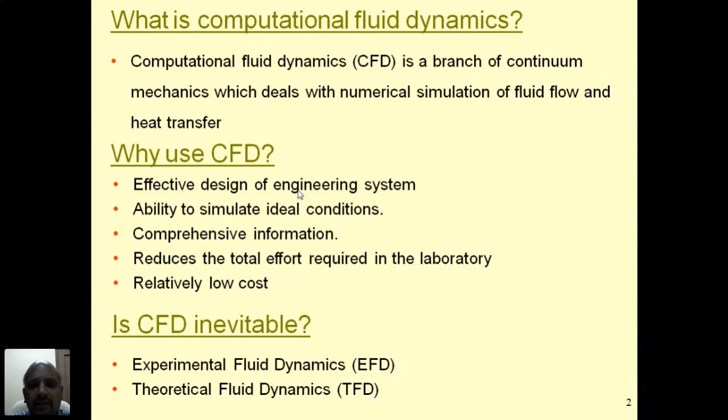In order to gain the advantages listed here, effective design, impossible conditions also, where we can analyze by using the computational method complete information for a given problem. So we can reduce our time as well as the cost, everything with the help of a computational method. These are all the advantages. So we can use CFD before the start of any experimental fluid dynamics.

To become a master in this subject, computational fluid dynamics, we should know the basics or fundamentals of three important subjects. One is fluid dynamics, then numerical methods, and heat transfer. Because, as I said, computational fluid dynamics is nothing but numerical simulation of flow and heat transfer, as well as mass transfer. So if you want to become a master in this subject, you should know the basic aspects or basic knowledge of fluid dynamics, numerical methods, and heat transfer, even mass transfer also.

Not only that, after gaining enough knowledge from these three different subjects, if you would like to apply this CFD concept in specific applications like combustion, mass transfer with phase change phenomenon, melting and solidification, rotordynamics, turbo machines, heat exchangers, aerospace, automotive - for different applications, you should know basics of the respective field. So after gaining knowledge from these three main subjects, we can apply the computational fluid dynamics concept to various engineering domains to solve engineering problems. That is the knowledge prerequisite for this subject.

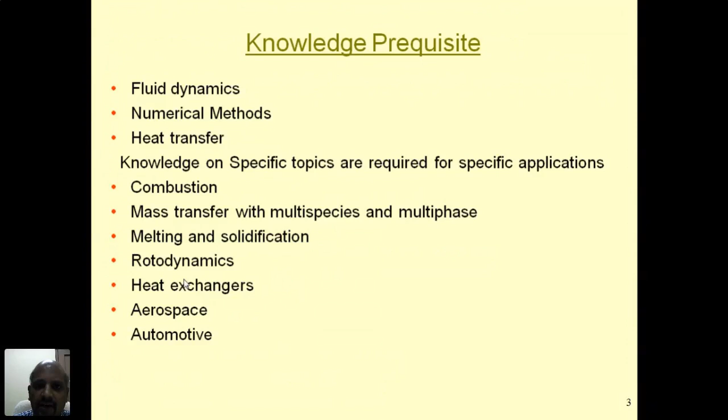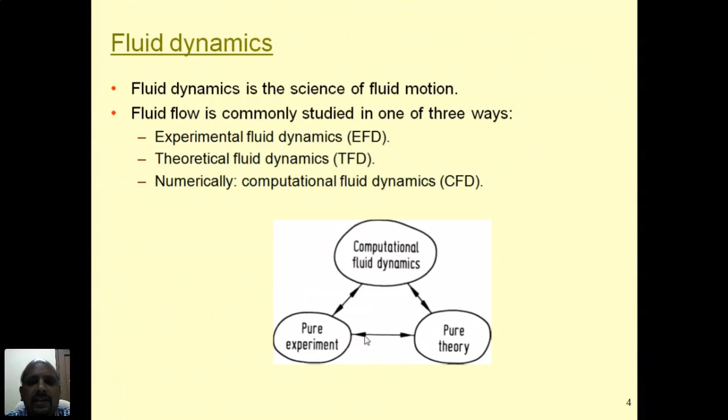So this is CFD. As I said, this is a complement between EFD as well as TFD, but each method - CFD, EFD, or TFD - has its own limitations, its own merits as well as demerits. Before starting off computational fluid dynamics, let me quickly cover the details of the advantages and drawbacks of EFD as well as TFD.

Experimental investigations - often there is actually no substitution for experimental fluid dynamics, because conducting engineering experimental study gives more information when compared to theoretical method or numerical method.

But there are a lot of drawbacks behind experimental investigation. One is that it is very expensive. To conduct any experimental study, first we have to develop and fabricate the experimental setup, which is expensive in most research-oriented applications. Sometimes it is impossible - some kinds of experimental studies are logically not possible to do at the laboratory level.

Moreover, in experimental study, it involves a lot of measurement, a lot of measurement errors.

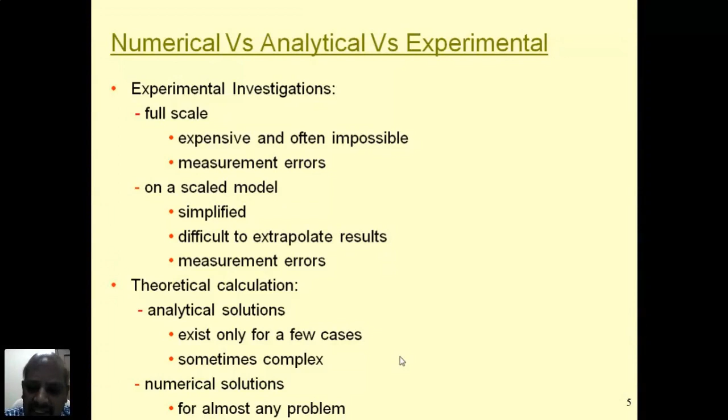Coming to numerical or computational method, this solution using computational methods for any engineering problem is easily possible for whatever kind of problem, whatever the complexity involved. It is possible to get the solution using the computational fluid dynamics concept.

That is the advantage. It's very cheap, as indicated earlier, and we can get more information regardless of the complexity involved. It is capable of solving using the computational fluid dynamics concept. That is the advantage. But the drawback - of course here also there are some noted drawbacks.

The first drawback: it deals with a mathematical description, not with reality. So it finally solves only the governing equations, which are useful to describe the physical phenomenon of a given problem. It deals with a mathematical description, not with reality. That is one of the drawbacks.

The other drawback is that for a given problem, multiple solutions are possible in the CFD method. So as an engineer, we should know which solution is more closer to our benchmark solution. This is called validation. We should always validate CFD results.

The validation is possible either by comparing with experimental results or by comparing with analytical results. Without validation, it is very difficult to quantify our CFD answer. That is the drawback of the computational method.

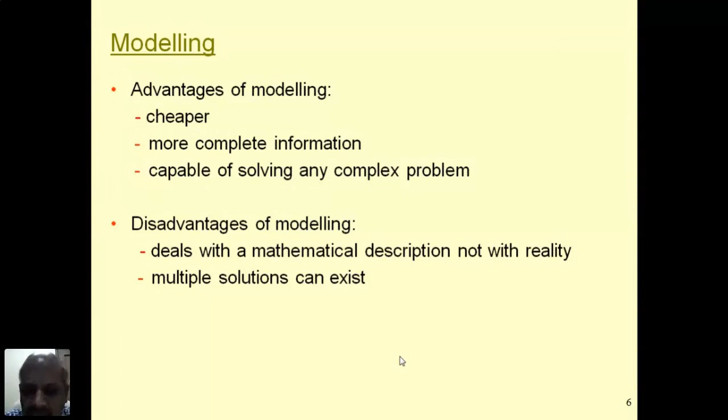Apart from that, this is very cheap in most situations compared to experimental investigation. There are many numerical methods available. CFD works based on discretization technique, and there are three major discretization techniques: finite difference method, finite volume method, and finite element method.

It is important to note that many of the software available in CFD programs are written based on the finite volume method. Almost 80% of the software is written based on finite volume method. That is the advantage of finite volume method compared to other kinds of methods.

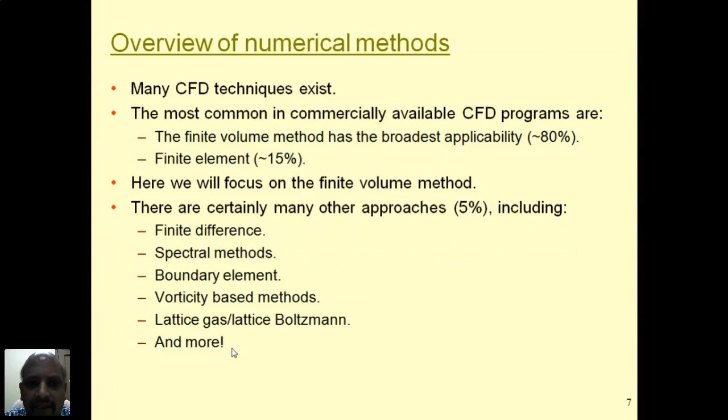There are different techniques possible in CFD: finite difference, spectral method, boundary element, vorticity, and many others. But the majority of CFD related software works based on finite volume method. So I will try to focus my lecture on finite volume method rather than finite difference and finite element methods.

So these are the limitations, actually the limitations of CFD. The CFD solution is mainly based on the physical model of the real given problem. Whatever model is chosen in the computational method - say, for example, turbulence, compressibility, and multiphase - matters.

To solve a turbulence related problem, there are many models available. So knowing which physical model is capable of solving a given problem is very important. Otherwise we will end up with a wrong answer. We should understand what physical models are available in the computational fluid method. By carefully choosing those physical models, it is possible to come up with a good answer using the computational method. That is one of the limitations.

The other limitation: as in experimental method, measurement error is a major problem. Here also there are some errors involved in numerical method, called round off error and truncation error. These errors are inevitable in CFD. That's why by solving problems in CFD we can get only the approximate answer - it is impossible to get an accurate answer using a computational method, because it involves a lot of error, like round off error and truncation error. These are simply called numerical error.

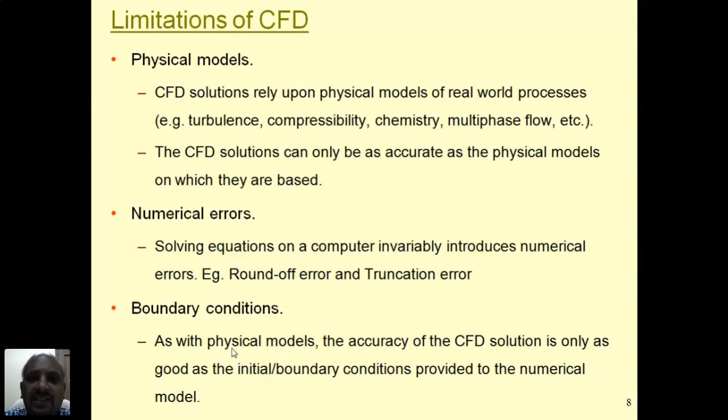But for steady state problems, the initial condition is not required. So by using those conditions we can really solve any kind of engineering problem. So when you fail to understand this physical model, numerical error, boundary conditions, definitely we will end up with only a fair answer. So it is impossible to justify or validate our CFD answer with a benchmark answer. So we should take care about this information.

So where can we use CFD? The CFD concept was initially started in the aerospace industry in the late 1970s, where the aerospace industry started to enjoy the benefit of CFD. Nowadays almost all industries are enjoying the benefits of CFD, like the automotive industry and the aerospace industry, where we can develop a good aircraft wing and a good aircraft engine with the help of CFD.

For automotive applications, as you can see, a flow past your car, like how much drag is experienced by the car because of its shape, we can analyze here. We can analyze the flow over the car and flow inside of the car, I mean the cooled air inside of the car. This can be analyzed.

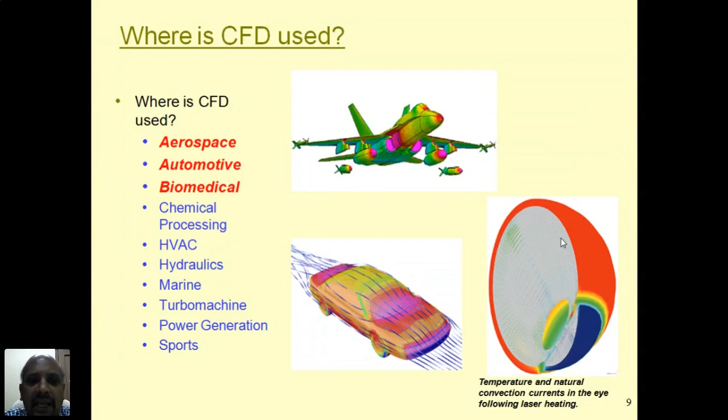The recent use of CFD in our society is in biomedical applications. So this is the laser treatment application shown here. During laser treatment, how much heat actually penetrates the human body can be captured with the help of CFD. In chemical processing also, we can apply it to the cyclone separator shown here to understand the flow and how these large particles settle down at the bottom of the cyclone separator.

Likewise, we can use this computational method in different chemical applications, and HVAC applications, like a person operating a computer and how the cool air is distributed. There are a large number of computers housed in a common room, where more heat is generated, and how much coolant air is required, and how the coolant air is distributed inside the room. We can analyze that and properly size the HVAC system by using CFD.

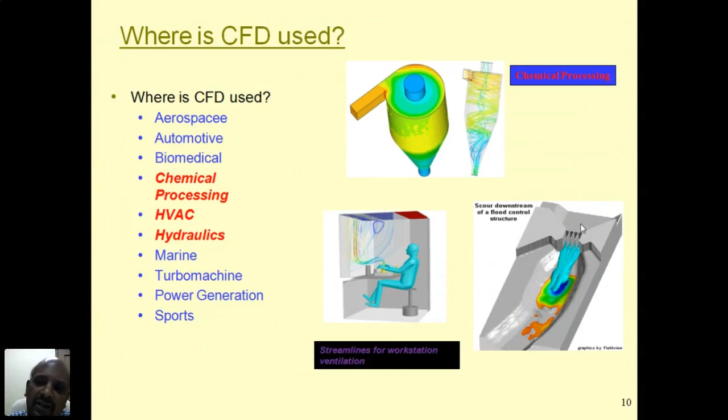And the hydraulics application, like the gate release of water from a dam, how this stored energy is converted into kinetic energy can be analyzed using CFD. In marine applications, the shape of the ship can be analyzed, and in turbomachinery applications you can see the rotor and stator. These are the blades: how the blade shape should be for better energy extraction from the fluid or better energy transfer to the blade, how many blades, and what the spacing between the blades is can be analyzed.

Sir, are you able to hear me? Sir, are you able to hear us? Participants, please be online. Just a minute, some technical issues. Hello. Yes, sir, can you hear my voice? Now it is okay. Suddenly the connection got lost. You can go for screen sharing. Yeah, now you can share your screen, sir. Sorry. No issues. Sorry for the technical issue.

Yeah. Your voice we are able to hear, sir, but the screen is not visible, sir. Your presentation is not visible. Yeah, now please minimize. Yes, sir. Now maximize it, sir. Yeah, sir. Now fine. Okay. Fine. Again, sorry. Okay.

So we can use this CFD concept for various engineering applications. There are some applications which I have listed here, where industry is really enjoying the benefit of CFD. So this CFD we can understand in two different aspects. One is theoretical computational fluid dynamics, and the other one is straight away using the software, how to solve an engineering problem by using the computational method. So there are two different ways: theoretical understanding of CFD and software understanding of CFD.

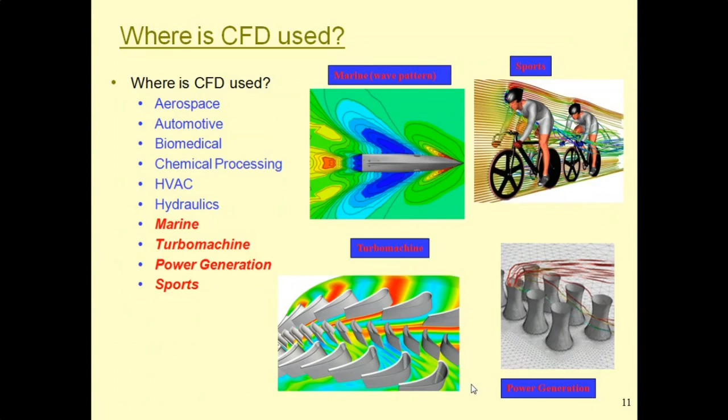But my suggestion, actually, first we should gain information about theoretical fluid dynamics, I mean, what are all the technical information and terminology involved in CFD. By gaining enough information about the theoretical background of computational fluid dynamics, when we use a software we can effectively use it to solve our engineering problem. So any engineer should study the textbook written on computational fluid dynamics, then move on to the software. That gives really more insight about computational fluid dynamics.

But here this scheme shows how to use software for CFD to solve an engineering problem by using the computational fluid dynamics method. To solve our problem by using software, it typically involves three important steps: pre-processor, then the solver, then the post-processor. In the pre-processor, it includes a lot of activities. One is creation of geometry. To solve any problem, first it is essential to develop a model, that is called creation of geometry, then we have to go for mesh generation. Then we have to identify the material property of the given engineering problem. Then we have to feed appropriate boundary conditions for a given problem. So these activities are generally called the preprocessor.

Then the next step is the solver. In the solver, we should identify what are all the transport equations. By solving the engineering problem using software, generally we come up with various variables. There are 7 engineering variables: the 3 velocity variables U, V, W, then temperature, then pressure, then density, then internal energy I. There are 7 variables. So to get all these variables, definitely we need equations.

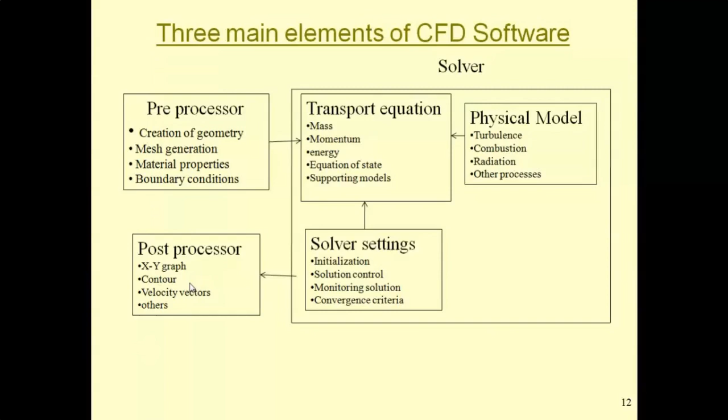The theoretical CFD procedure is somewhat different compared with solving the problem using software, but the basic method remains the same. In software, many features are available, so it is possible to solve even very complex problems using software compared to solving them theoretically.

Here a simple example is given: liquid filling in a bottle. The whole bottle is divided into a number of subdomains. You can see the grid. This whole domain is converted into a number of subdomains. Then we have to identify the governing equations for this fluid filling in a bottle. After writing the governing equations, we have to convert them.

So normally in CFD, what happens? The domain is converted into a number of subdomains using the mesh. We have to identify the governing equations and solve them for each and every subdomain. The software is capable of solving only algebraic equations, not partial differential equations. The transport governing equations, like the continuity, momentum and energy equations, are all available in partial differential form, but the computer can solve algebraic equations rather than partial differential equations.

So in the computer, there is a procedure. All these partial differential equations are converted into algebraic form. Once converted, we can solve the algebraic equations using a numerical method, and finally come up with the variables: temperature, velocity, pressure, or whatever variable we want. The algebraic equation is an approximate representation of our governing equation.

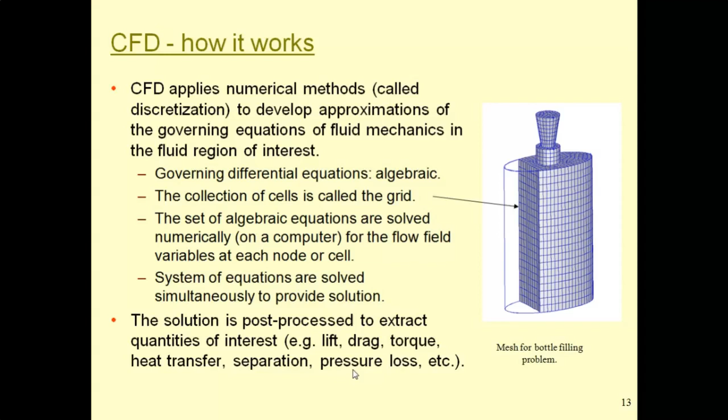These governing equations are converted into algebraic form, and the system of algebraic equations is solved using the software, so that we get all the variables at the end of convergence. Whatever the problem, this is the standard generalized transport equation, where phi is replaced by u, v, w, h, or 1. Accordingly, it is called the momentum equation, energy equation, or continuity equation. We solve this governing equation by substituting the appropriate phi.

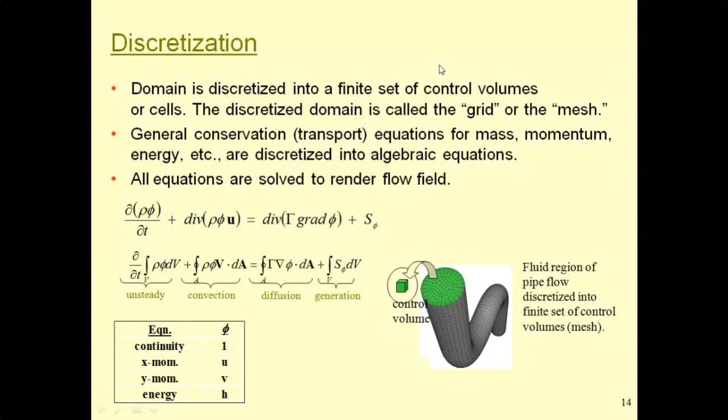This equation is solved with the integral method, the finite volume method, which is also called the integral method. Using the finite volume method, it is possible to convert this partial differential equation into an algebraic equation. Finally, we solve these algebraic equations with a numerical method.

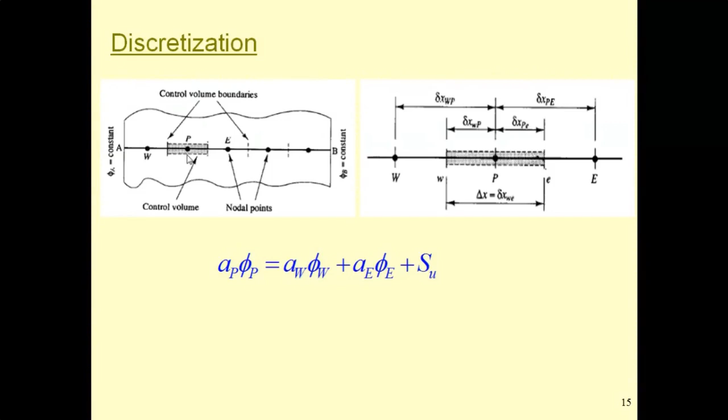So first we have to consider a domain. This domain is converted into a number of subdomains. Then by using CFD, we will get answers only at the discrete locations, not at the whole domain. So for every subdomain or every grid mesh, you apply the governing equation, convert the governing equation into algebraic form and solve the algebraic equation with the help of a numerical method. Finally, we will get all the engineering variables. Okay, this is the basics about CFD.

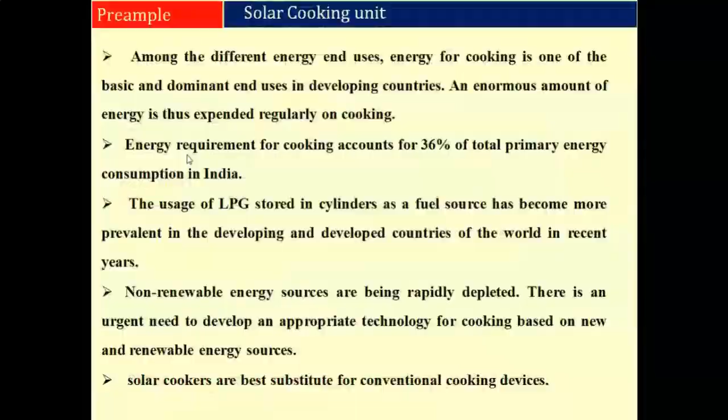Okay, there is some research work which we performed in our institute that I would like to share in this forum. The first research work is solar cooking, development of a double-walled solar cooking unit. That is one of the CFD works which I have performed. So before discussing the CFD for development of the cooking unit, I'll show you the significance of the development of the cooking unit. So here there is a double-walled cooking unit. We conducted a computational analysis about the efficiency of this double-walled cooking unit.

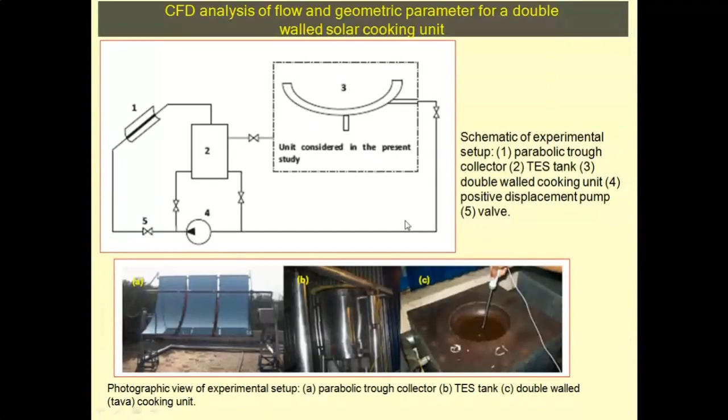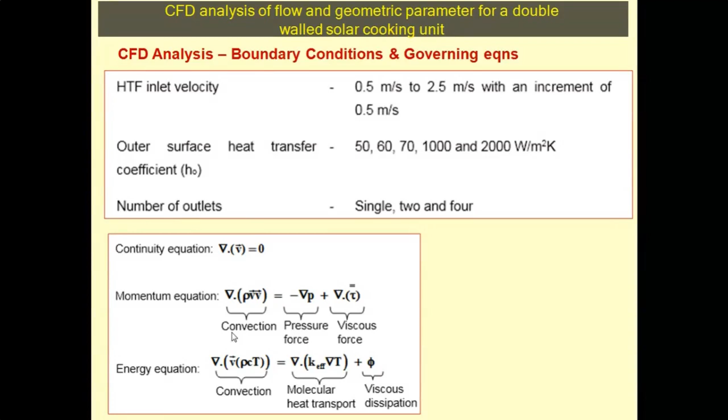So we identified the boundary conditions. As I said, proper boundary conditions are very much essential to solve an engineering problem. We identified boundary conditions and enabled the governing equations. Since this is a flow with heat transfer, the continuity equation, momentum equation, and energy equation, 3 equations are enabled. These are all automatically available in the software. Our duty is just to click those equations. Then the model has been created. This model consists of one inlet and one outlet.

To get a good answer from the computational method, we have to conduct a grid independence study. This study gives how many meshes are required to solve an engineering problem. As I said at the very beginning, for a given engineering problem, multiple solutions are possible in CFD. For example, to solve this tawa model, when you consider 10,000 mesh, you will get one answer. When you consider 1 lakh mesh, you will get a different answer. With 5 lakh mesh, a different answer again. So for different numbers of meshes, we end up with different answers.

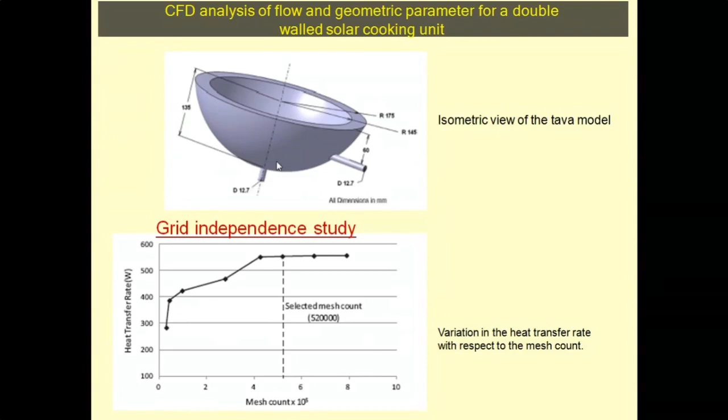So for this problem I identified 5,20,000 meshes. After freezing the number of meshes, I extended this analysis by considering various numbers of outlets. In the diagram, one inlet and one outlet are shown. Here you see one inlet, and the temperature results are taken from the analysis. One inlet and 2 outlets and 4 outlets, right?

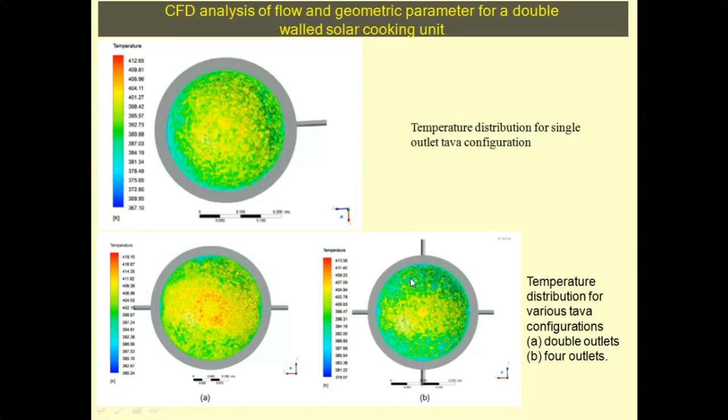The trend of change in heat transfer rate as time progresses in the CFD study is very much similar to the experimental study, and moreover there is little difference in heat transfer rate between the computational and experimental results. In this way, we justified the meshes opted for the given problem and the solving procedure, which is validated with the help of our experimental study. So in this way we validated the study.

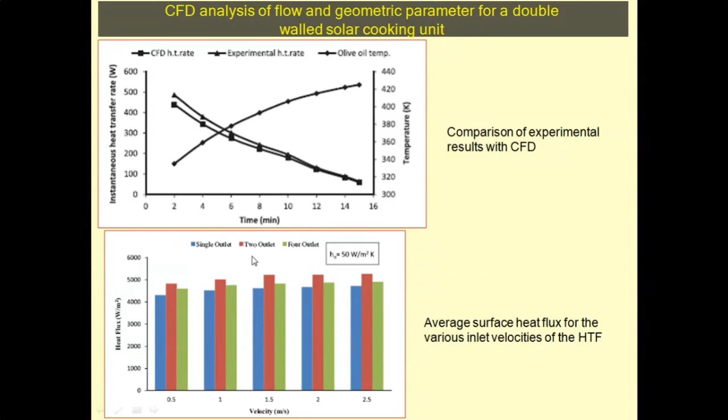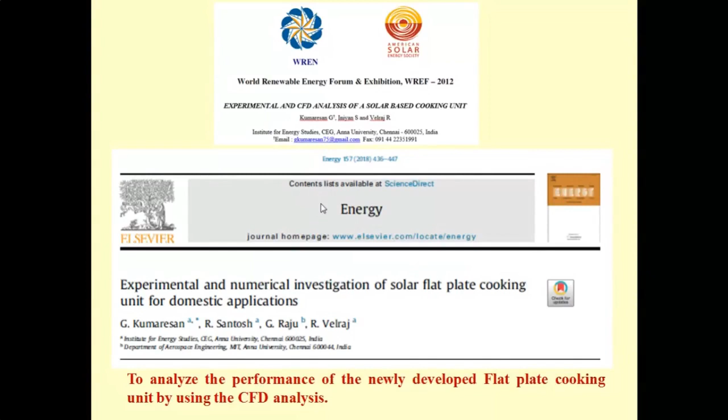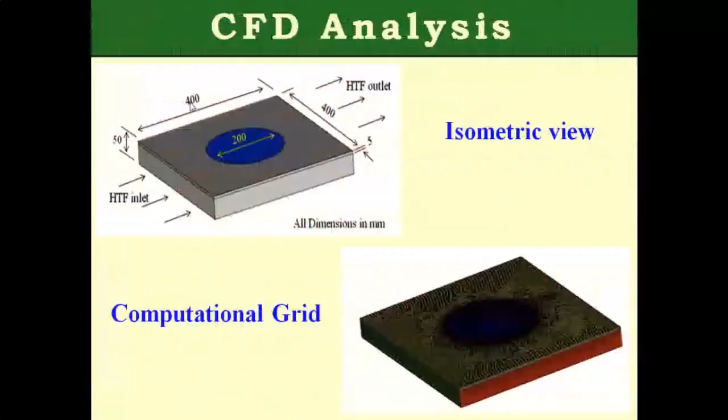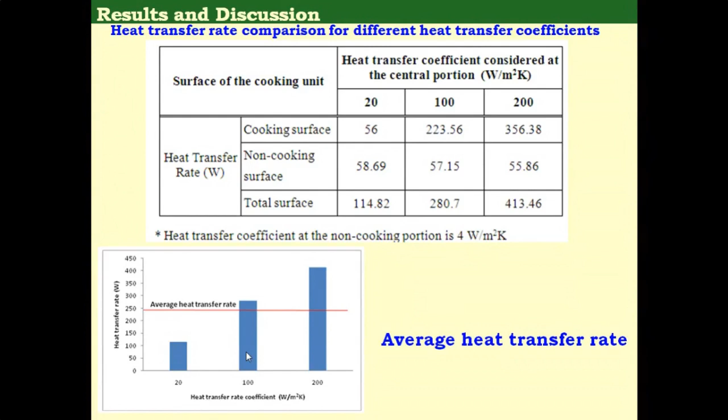In this way, we developed a double-walled flat plate cooking unit, which is capable of delivering enough heat to the foodstuff by considering various boundary conditions and various discretization procedures adopted in this paper. For the rest of the information, you can go through this paper to get more information about the CFD approach and how to solve the flat plate cooking unit.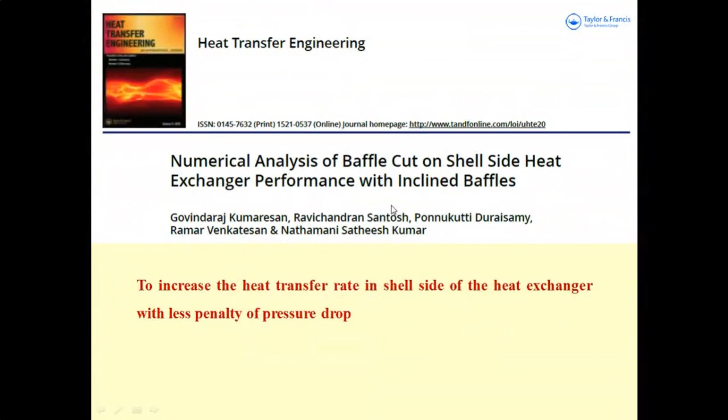Then, other work which we performed is about a heat exchanger using computational methods. In a heat exchanger, the normal design consists of baffles, and the baffles are used to change the shell side fluid flow direction. Thereby, the residence time of the shell side fluid increases greatly in the heat exchanger, so that heat transfer takes place from the shell side fluid to the tube side fluid or vice versa. But vertical baffles create a major drawback of more pressure drop.

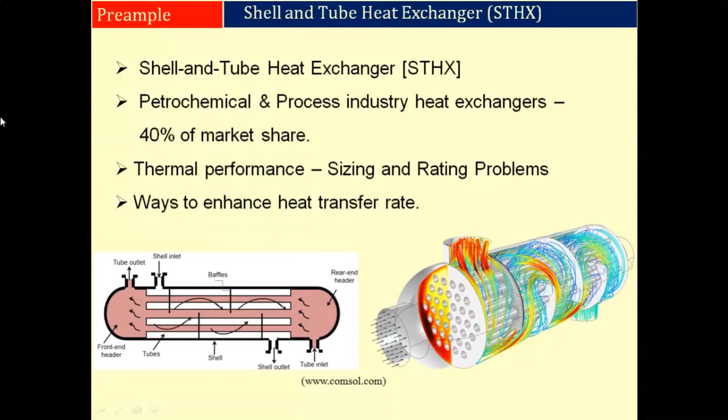As I said, the vertical baffles create more pressure drop, but the heat transfer rate is more. So though the heat transfer rate is more, the penalty is more pressure drop. We wanted to tackle this issue, to get more heat transfer at the expense of less pressure drop, so we went for an inclined baffle.

For the inclined baffle, we considered various inclination angles. We wanted to know what inclination angle is better to get more heat transfer rate, at the same time less pressure drop, for which we considered four inclination angles: 25 degree, 30 degree, 35 degree, 40 degree. Zero degree means the vertical baffle, the conventional baffle.

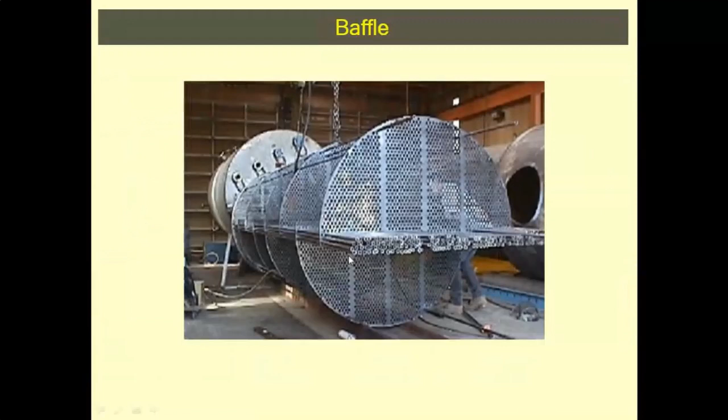And we also varied the baffle cut, which is nothing but a gap provided in the baffle. Here you could see very clearly, this is the baffle plate, and the portion which is removed off from the baffle plate is called the baffle cut.

Too small a baffle cut and too large a baffle cut both create a lot of problems, so an ideal baffle cut, proper spacing, is very much essential to get less pressure drop at the same time as more heat transfer rate. The optimal baffle cut was already identified by people for the conventional baffle, but for the inclined baffle we wanted to know what the optimum baffle cut is, for which we took other information.

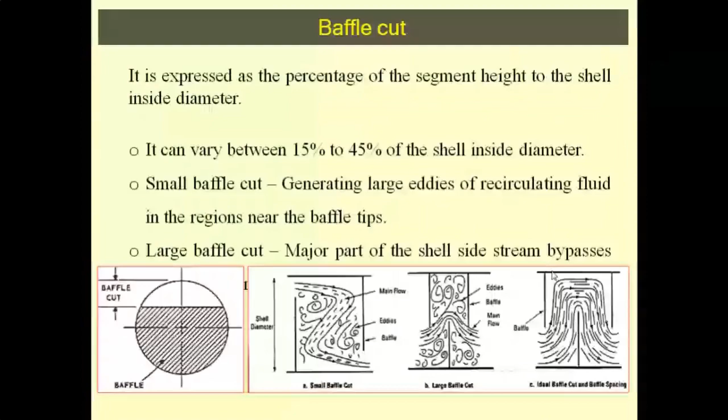So we considered 25%, 30%, and 35% baffle cut, along with different inclination angles, and we analyzed and compared the pressure drop and heat transfer rate against the conventional baffle. Finally, we proposed the best combination of inclination angle and baffle cut, which is what was performed in this study.

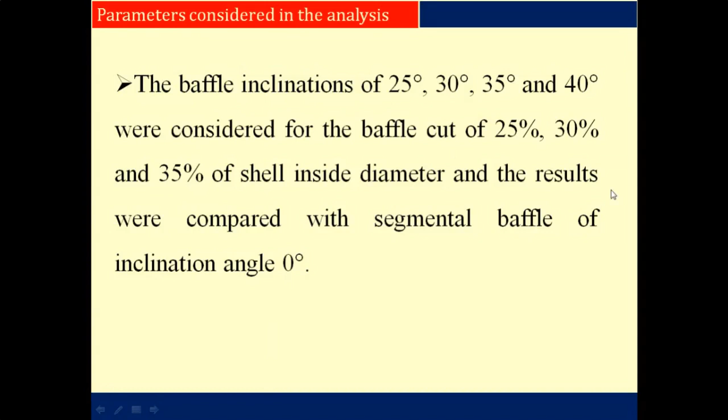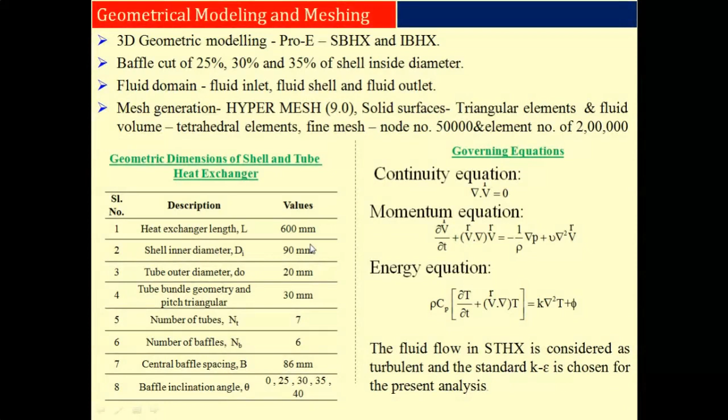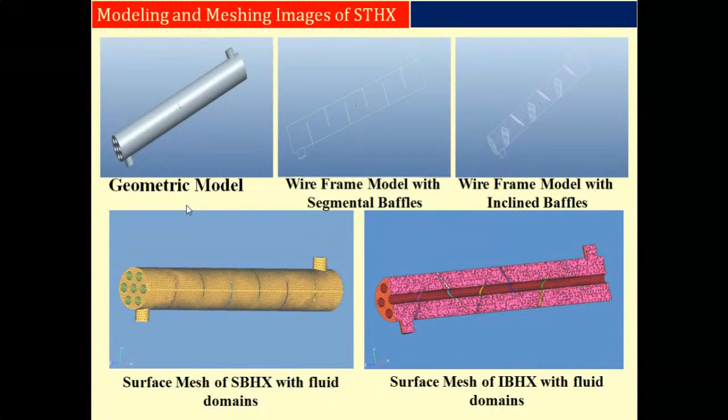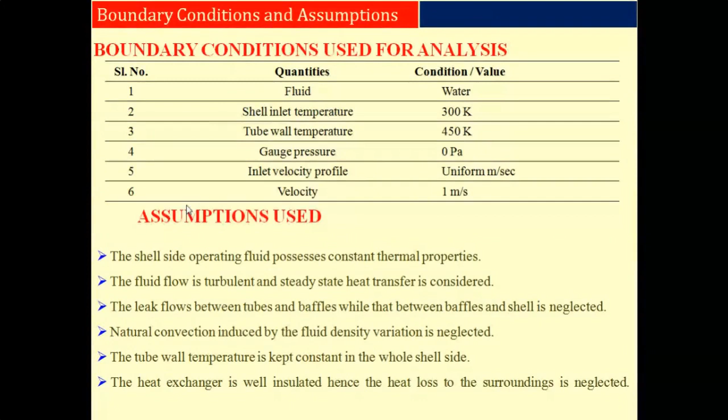For this, we identified the governing equations and boundary conditions of the heat exchanger geometry, which was taken from that paper, and a model was created and meshed, then analyzed for various inclination angles and baffle cuts. Finally, in this paper we reported all the properties taken into account and all the assumptions invoked for this problem.

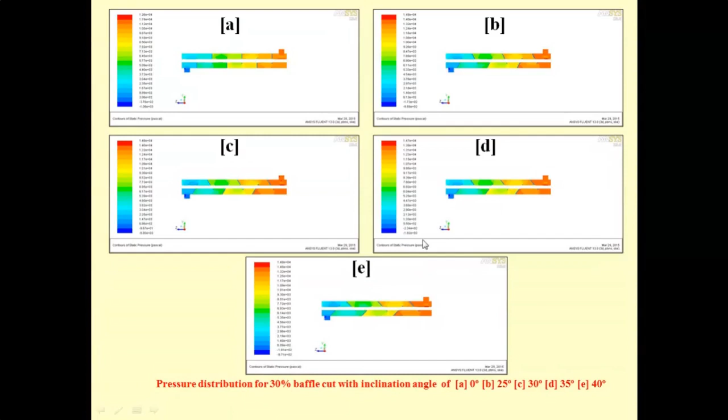We'll quickly see only the results. The top diagram shows the vertical baffle, and the rest show the inclined baffle for pressure drop, for various arrangements, with inclination angle from 0 degree to 25, 30, 35, 40 degree. Pressure drop and temperature distribution were taken, heat transfer rate was evaluated, and finally the velocity vector was also taken from the analysis.

That's why I said using CFD it is possible to get the complete information. But when you do all this analysis using the experimental method, you need to measure pressure drop individually and temperature drop individually.

We need a flow meter individually to get all the answers for velocity, pressure, and temperature. We have to rely upon individual instruments. But in CFD, using one physical geometry and meshed geometry, it is possible to extract all information. That's why complete extraction of information is the good advantage of CFD.

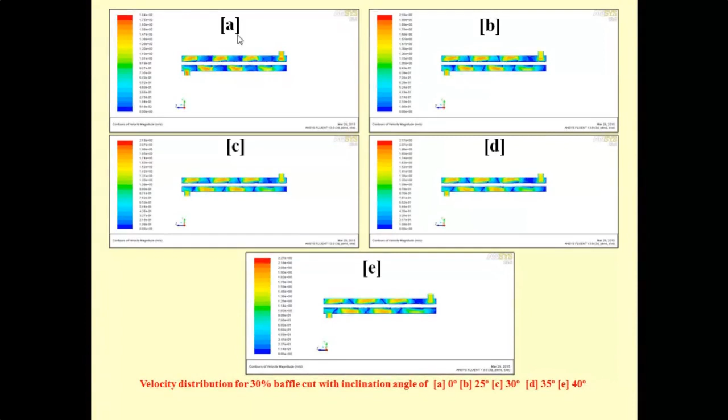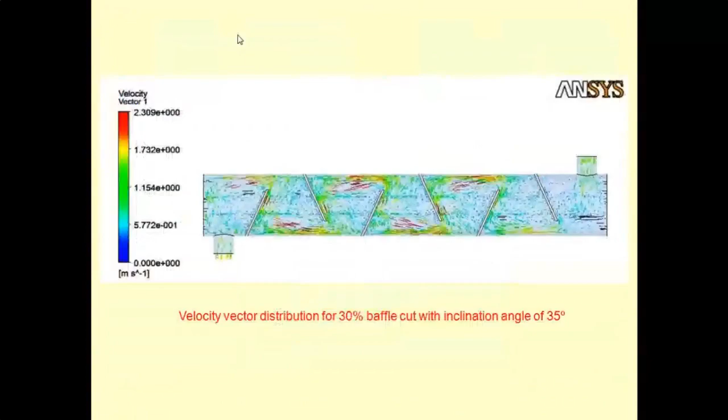When you do this analysis in reality, we have to fabricate heat exchangers for various combinations. We have to fabricate at least 8 heat exchangers: conventional baffle, 25 degree inclination angle, different inclination angles, and 3 variants of baffle cut. So we need 8 heat exchangers plus 1 conventional heat exchanger. It is highly impossible to construct a heat exchanger considering all these aspects.

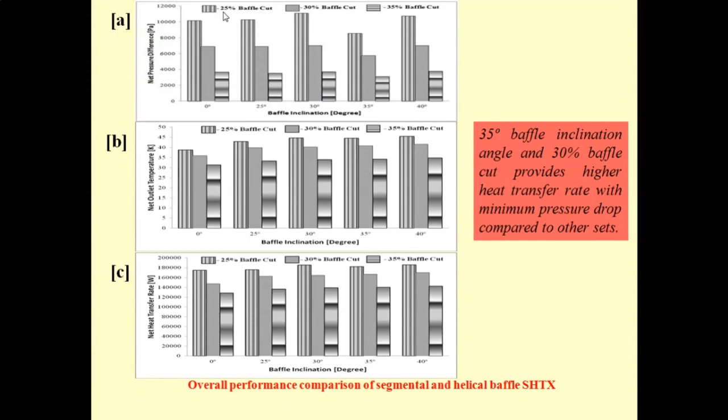That's why using this CFD analysis, first we can solve the problem for various combinations, whichever combination gives a favorable result. For that combination, it is enough to fabricate our final original model. For that final model, we can fabricate and conduct experiments, and compare our experimental results with the computational results to validate our CFD answer. So this is one of the CFD works which we have performed in heat exchanger.

Then another work which we performed using CFD is for a phase change problem. For this phase change problem, we took a spherical capsule filled with phase change material, paraffin phase change material. This paraffin phase change material melts when the temperature goes more than 55 degrees centigrade, for which a setup has been created.

In the setup, we have a blower used to suck the ambient air, which is passed over the heater compartment. The air is heated to the required temperature. This hot air is admitted over the spherical capsule. Thereby, heat is transferred from the hot air to the spherical capsule, so that the paraffin stored inside the spherical capsule will start to melt.

We would like to know what is the time taken for the phase change of paraffin from solid to liquid. This time taken we have analyzed by using experimental method as well as computational method.

In the melting problem, the heater is switched on and the incoming air temperature is raised to the required temperature, for which a thermostat is provided that takes care of the temperature rise of the incoming air. Then the melting process is carried out, followed by the solidification process.

In the solidification process, the paraffin is already in hot liquid form, so at that condition the heater is switched off, and ordinary ambient air is blown by the blower over the spherical capsule. This coolant ambient air, when passed over the spherical capsule, picks up heat from the spherical capsule. Thereby, the liquid PCM turns to solid PCM.

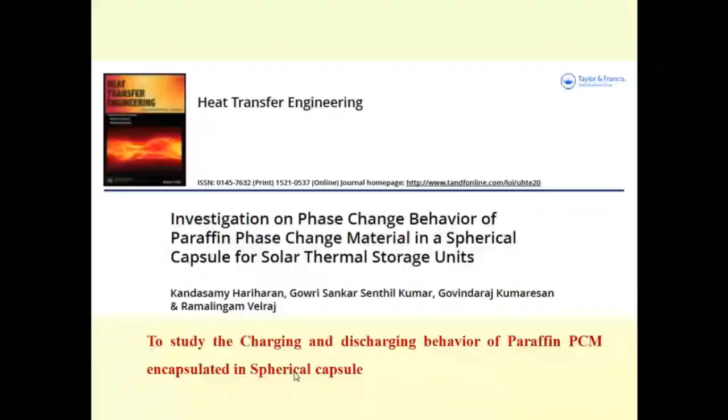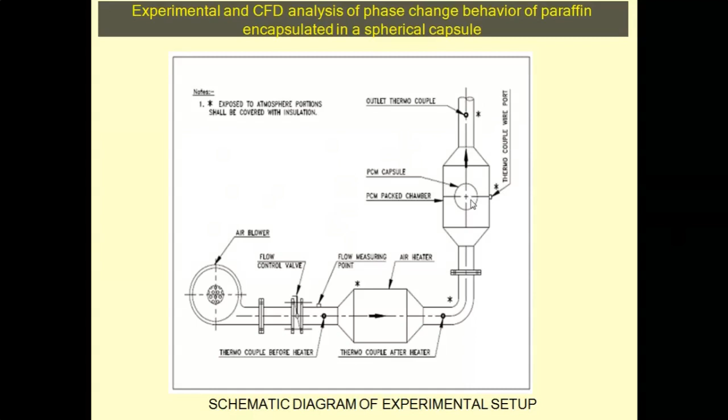Same experimental setup. We fabricated three spherical capsules. One is plain, another one is circumferential, the third one is orthogonal fin. So for the same three spherical capsules, we conducted a similar kind of experiment and we compared all the results. So this is a phase change problem which we have analyzed by using the computational method. So these are some of the work which we have performed by using the computational method.

So this computational method obviously gives more information when compared to the experimental method. So before the start of any experimental work, it is inevitable to start our problem by using the computational method. Once you get the favorable result by varying the flow conditions and the geometry conditions, once you freeze the flow and the geometry conditions effectively with the help of computational analysis, then finally we can go for the experimental method. In this way, we can save our precious time as well as the cost in terms of development of the experimental setup.

So that is the advantage of the computational method. That's why most of the industries use a computational method in order to gain the good advantage of saving time and saving cost. That is the benefit of the computational method.

So with the time allotted, I would like to stop. There is much more work which we have performed, but as per the time allotted, I would like to stop my lecture here. So the audience, if you have any specific doubt on the introductory aspects of the computational method, I would like to answer your queries.

Yes, sir. Thank you so much. First of all, the fundamentals have been clearly explained. Yeah, thank you. And one of the important concepts which cannot be understood by all is grid independence study and convergence analysis. It was explained in a nice manner, so even a layman can easily understand the way in which you have explained. So thank you so much for explaining nicely, sir. And the fundamentals, the need to go for numerical simulation over experimentation and the necessity, have been explained thoroughly.

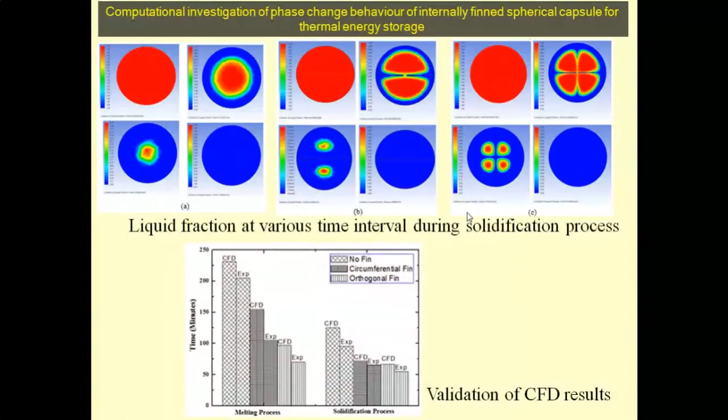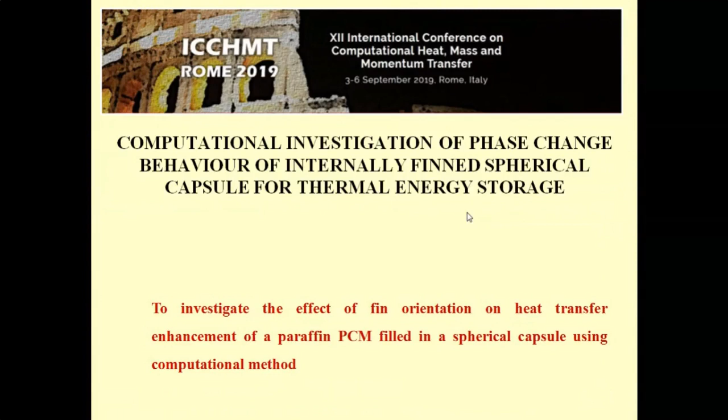Applications of CFD software. Yeah, there are different software packages available. Many of the software, as I said, work on the finite volume method. So for flow, heat transfer and mass transfer related problems, we can use ANSYS Fluent, which we used here to solve flow, heat transfer and mass transfer related problems. Apart from that, we can use OpenFOAM. Nowadays people have started to use OpenFOAM software and COMSOL software. There is also STAR-CD, particularly used for combustion applications.

There are many softwares available, but in my understanding of computational fluid dynamics, nowadays it is better to use OpenFOAM when compared to other softwares, because more options are available in OpenFOAM, and we can easily learn this software and enjoy its benefits. Since it is openly available, our students have also started to use OpenFOAM. Apart from that, you can use licensed software, STAR-CD, ANSYS Fluent, COMSOL, whatever it is, but many of the flow related softwares are based on the finite volume method.